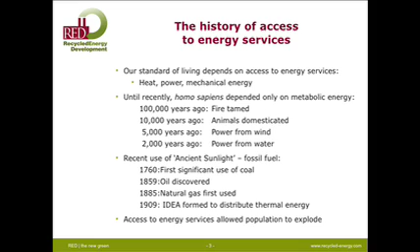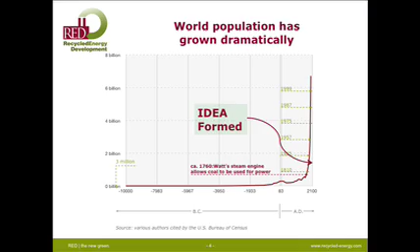This is the population of the world, and you can see that it's grown rather dramatically—almost a flat line up until just before the time of Christ. And then what really took off was James Watt's steam engine, which allowed us to start converting coal into mechanical power. Others would argue that it really was the formation of the IDEA. But somewhere in there, those two things caused a very unsustainable trend of population rising like a rocket ship, showing no signs of coming down.

Now this leads to a couple other problems, and it's pretty scary. We look from 1850 to the present at the population, and we can see it's up 430%. Population has more than quadrupled during the lifetime of IDEA. What people don't realize is that the energy consumption per capita—this is the raw energy, not the energy use—has gone up by 760%.

Now, this is the whole world. This counts the Somalians and the Bangladeshis, as well as the people that chose their parents better and live in a nice country like we live in. When you put that all together, the total energy consumption in the last 150 years has risen by 4,600%.

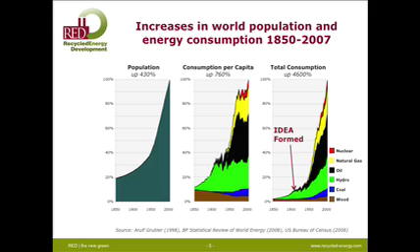Ladies and gentlemen, I am showing you the definition of unsustainable. Look at what's happened over the history of IDEA. Virtually all the energy that we're consuming in the world has happened in these 100 years.

Now let's take that to another particular point of view. During the first 100 years of IDEA, 90% of human greenhouse gas emissions occurred. As a matter of fact, it's kind of surprising that since 1979, half of the greenhouse gases ever emitted by humankind have been emitted—since 1979, within the lifetime of anybody here in the room. And if you look at when the IDEA was formed, 90% of those greenhouse emissions have happened since then.

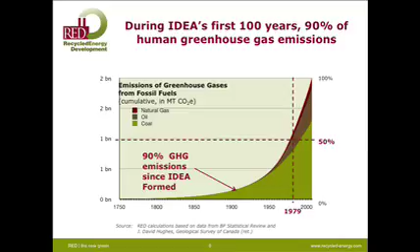You read about all this stuff and think there's some scientific controversy, this and that and the other. Just look at the data. Just look at the data. The climate change is occurring much faster than predicted.

Every prediction of 10 years ago about what was going to happen has been wrong on the low side. Everything bad that could happen is happening faster than we said it would happen. The feedback effects are occurring in ways that the models never fully anticipated. We're just about to have open passage across the Arctic.

Melting ice caps, rising sea levels, increasing ocean acidity. The coral reefs as we know them are finished. If you want to enjoy coral, get out there now because it's gone, folks. There is going to be no more coral.

It's way too late to stop it—all of the marine species that come around that. As a matter of fact, the growing species extinction in the world is at 1,000 times the background rate. This is the 5th major species extinction in the history of the world, and this one's being caused by us.

So I said that there's a silver bullet, and I'm going to go right to it. Let's look at the generation story. Electricity generation is the largest source of CO2 in the United States. These numbers are comparable in other places.

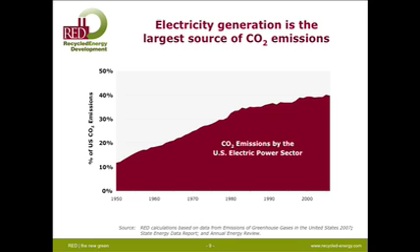In 1950, it was 11% of the CO2. Today, it's 40%. And that curve is going to continue to rise as we electrify vehicles and continue to electrify and so forth.

If you're going to do something about any problem, you want to follow the Willie Sutton thing. There's a bank robber, and when they got him in front of the judge, he asked, "Why do you rob banks?" And he says, "Because that's where the money is." Well, if you're going to do something about CO2, you're going to have to attack where the money is.

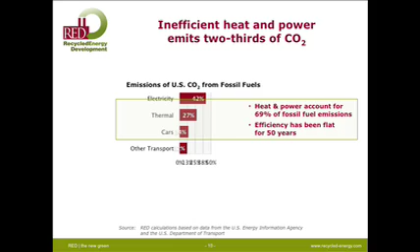Which is electric generation. The generation of heat and power, 42% and 27%, represents 69% of the fossil emissions, and the efficiency of both have been flat for 50 years. We have all kinds of conversations about automobiles and changing this technology and that technology. We just continue to focus away from where the problem is. The problem is in generation of heat and power. That is where the silver bullet lies.

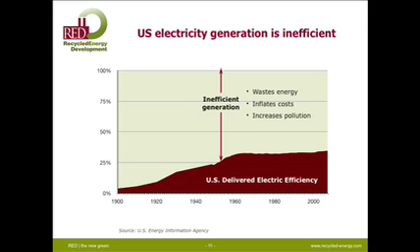Look at the electric generation. The U.S. delivered electricity efficiency started at about 6% back in 1900. It rose through World War I and World War II. Finally, after World War II, by the time Eisenhower was still in the White House, it got up to 33%. And it has remained at 33% ever since, in spite of unbelievable technological developments. This is not caused by a lack of technology. It's caused by vested interests maintaining policies that support what they want rather than what's good for the world. Period, end of story.

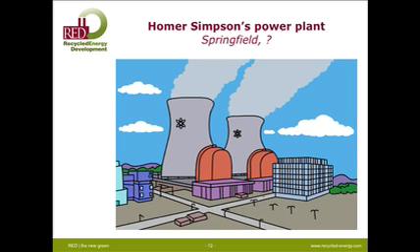Every kid knows that a power plant puts out a tremendous amount of waste heat because they watch The Simpsons. That's a nuclear plant in the front, but what you really see is the big cooling towers. They say, "Okay, Tom, don't use cartoons. This is a serious conversation. Let's use a real plant."

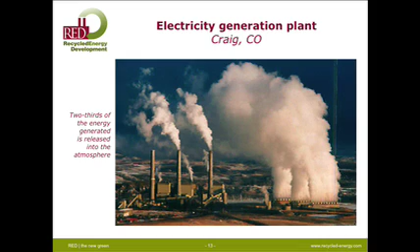Craig, Colorado, taken on a cold morning, and what you see is all that heat coming out of the cooling tower. That plant has been pumping away since before 1950, and it takes two-thirds of all the fuel that it puts out and uses it to warm the air at Craig, Colorado. Not particularly useful.

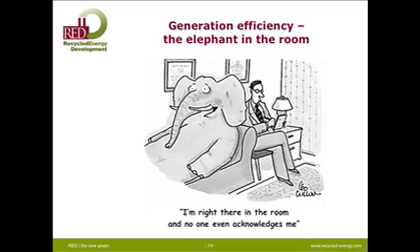Generation efficiency, that's the elephant in the room. That is the silver bullet. Nobody talks about it. We put all kinds of policies into doing everything else and ignoring this because most of the energy industry makes its money on this inefficiency, and they don't like to change the rules. And those of us that have tried to do CHP over the last 30 years know that all too well.

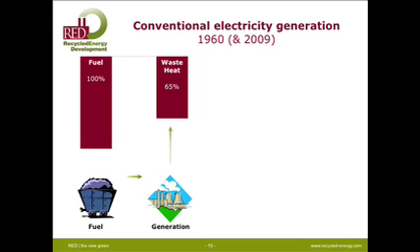Let's look at a little picture and explain this better. You start out with 100 units of fuel. You put it in a central power plant, and as you've just seen in the picture, you throw away 65% of it. That's smart, very clever. Then you run it through a long set of wires and waste another 2% of it, which is really 9% of what gets produced. Finally, this all gets out to useful power of 33%.

And these are data good for 1960 as well as 2009. It's really handy, I don't ever have to revise this graph. It's just always the same.

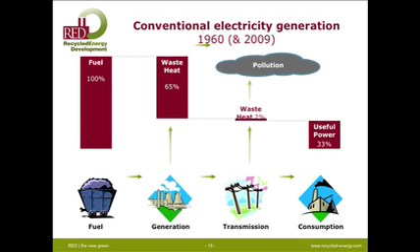Let's try another way. Let's take that same 100 units of fuel and put it in a series of small plants that combine heat and power. What does that mean, combined heat and power? You take the heat that you were throwing away and put it in a pipe, like in Elwood, Indiana, 100 years ago, and you run it to somebody and avoid a boiler.

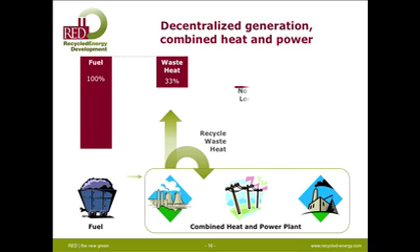Now what happens? You've still got waste heat, 33%, but you're recycling a lot of the waste heat, bringing it back. You have no line losses because when you have local power plants, you don't need long wires that waste all the energy. You still need long wires to connect us, but you get very few line losses when the power goes right next to the guy. Over to the user, you've got 33% useful thermal energy, 33% useful electric energy, and you're up to 66. You have doubled the efficiency.

What do you mean there's no silver bullet? We know how to do this. Why don't we do it?

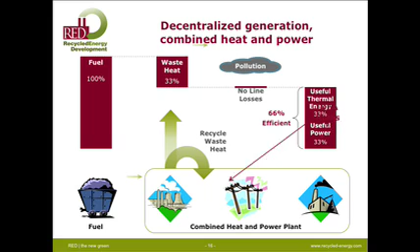Well, that's the IDEA role. Your job is to recycle the waste heat. If you're just boiling water and sending it through a steam pipe, you're not doing your job. Your job is to get the cogen plant built so that what you're really sending out to people is heat that would have otherwise been thrown away. Then you're doing your job, and then it starts to make some sense.